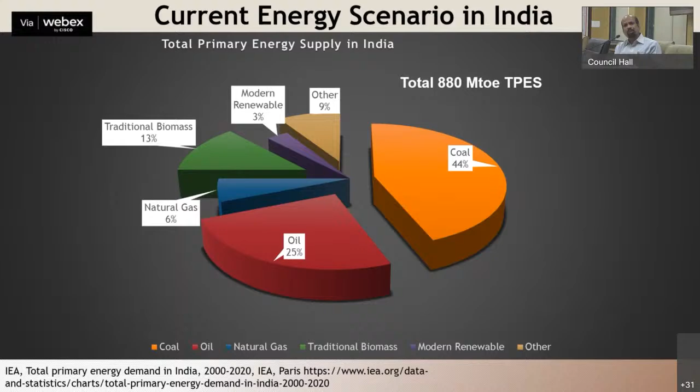If you see where we get this 900 million tons of oil equivalent, it's primarily from carbon-based sources. Coal contributes roughly 44%, oil is 25%, biomass 13%, natural gas 6% - more than 90% comes from carbon-based sources. The renewables and other contributions are very small. This is not only the case in India, but mostly the world average as well - the numbers are very typical to this.

Let's look at how much we have, what nature has given us, and how much we import. As we all know, oil is the most critical aspect because two-thirds of this energy source, especially oil, we import. Coal is also almost one-third imported. Natural gas is almost 50-50. So a significant portion of total primary energy sources are imported, and that is basically what Kakodkar Saab used to say is an important element on the health of our economics. Our country, because more than 50% of total energy is imported, bears a big burden on the tax system.

Then how do we consume that? So 900 million tons of oil equivalent is imported. When you convert to usable energy form, roughly 600 to 650 million tons of oil equivalent is what we consume after the losses. Out of that, today especially for India, industry is one of the largest consumers - almost 40% of energy is consumed by industry, both for heat and electricity purposes, followed by residential at almost 30%, again mostly for electricity as well as for cooking and heating purposes. Transport comes next, almost close to 16%, which is roughly 100 million tons of oil equivalent, and the rest, about 13%, goes to the services sector.

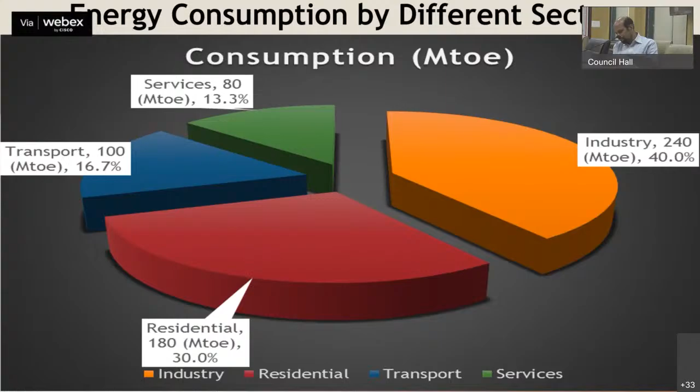But fortunately or unfortunately, let us leave that for the time being, because we have a large population, roughly 1.4 billion, so our per capita energy consumption is quite poor. Today we consume something like 1208 kilowatt hour per year, which Dr. Grover Saab has been saying. Look at our neighbors - they consume much more than us, more than two times, three times.

The world average energy consumption is almost 3 times what we consume in India. OECD countries consume more than 7 times what we have. So there is a big difference between what we have and what we should target—3 times or 5 times—because per capita energy consumption is closely linked to the Human Development Index.

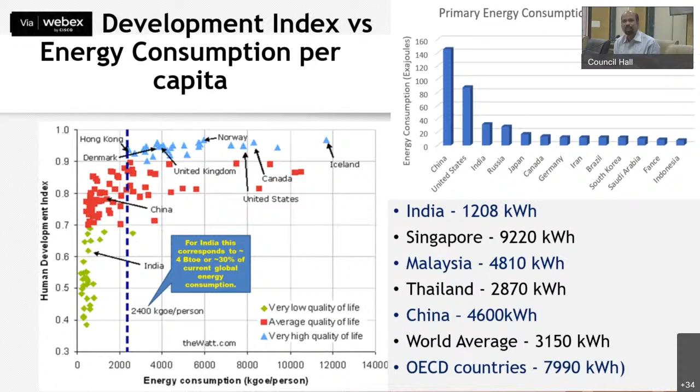If you look at the bottommost graph, India is not so well placed, and we have to climb towards the top, having an HDI of 0.9 or at least 0.8. That way, per capita energy consumption has to multiply by several times. This is one front.

But where is the energy demand coming from? The Niti Aayog says India today houses roughly 100 million people without access to electricity and more than 840 million people without access to clean cooking fuels.

Our installed electricity capacity has jumped quite fast, from 169 gigawatt to 377 gigawatt in the last 10 years, with a compound annual growth rate of more than 8.42%, which is significant compared to the world. This is primarily driven by our economic growth, one of the fastest in the world.

But there is a problem with our population. The Population Reference Bureau has estimated Indian population to reach something like 1.67 billion by 2050, surpassing China. Similar estimates by the UN project around 1.64 billion by 2050.

That means another 20 to 30 crore people are going to join us in the next 20 to 30 years. The implication is that India will soon become the world's most populous country, adding the equivalent of a city like Los Angeles to its urban population each year.

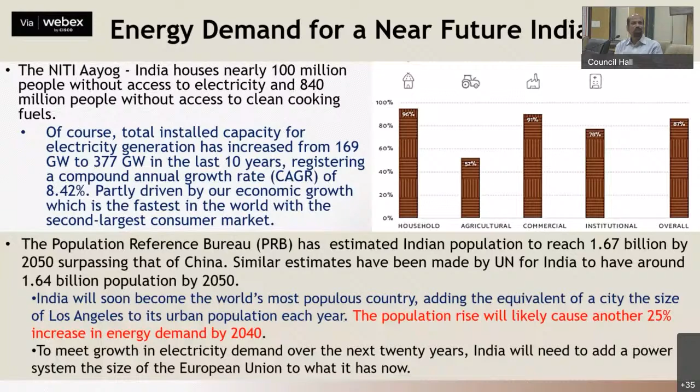This population is going to demand another 25% energy by 2040. To meet the electricity demand over the next 20 years, India will need to add a power system the size of the European Union to what it has now.

India's urban population is projected to increase from 31 to 51%. So there is going to be significant energy demand, especially in the urban sector.

The GDP is also going to grow at 8.5% from 2012 and remain steady till 2047. There will also be higher energy demand in the manufacturing sector, expected to rise to 34% in 2047 from 16% in 2012.

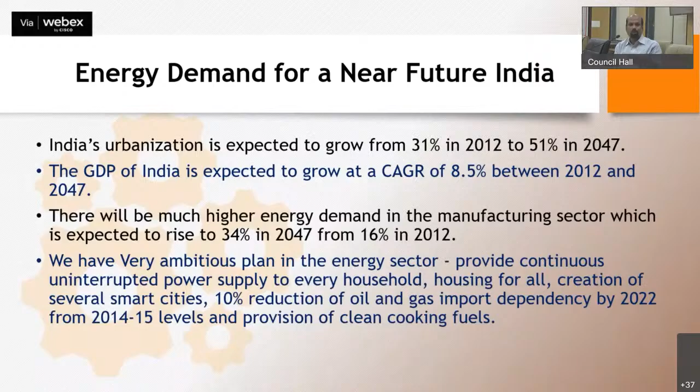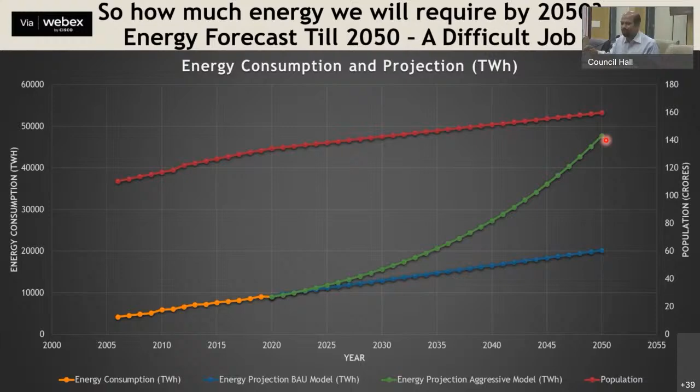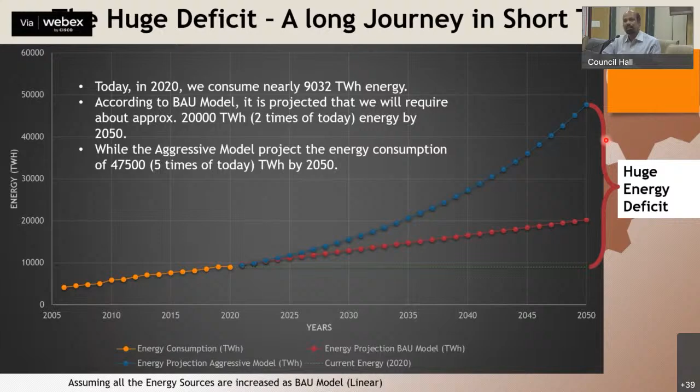As I said, in 2020 we consumed nearly 9,032 terawatt hour energy. In the BAU model, 20,000 terawatt hour, roughly 2 times today's consumption, is what we need to achieve. With the aggressive model, assuming we want a life closer to the Western life, we need to produce 5 times. So if I look at the difference, it's a huge energy deficit of at least 10 to 40,000 terawatt hour, which must be achieved in the next 30 years.

Even with 10,000 terawatt hour, let's look at the biggest story worldwide, including India - the greenhouse gas emissions. As I said, more than 90% of the fuel we consume is linked with fossil-based fuels. Today the carbon-based oxides, including carbon monoxide and carbon dioxide, are the root cause of greenhouse gas emissions. Almost 76% of GHG is emitted from carbon-based sources because of CO2 and carbon monoxide.

Another 16% is from methane, which comes from biomass and waste. Nitrous oxide is almost 6%, and fluorine-based gases emit 2%.

Historically, from 1990 to 2020, roughly the last 30 years, look at how much greenhouse gases we have added to the atmosphere. Believe it or not, we have added very significantly - from roughly 40 gigatons of CO2 equivalent in 1990 to almost 60 gigatons CO2 equivalent in 2020. Roughly you can say almost a 50% increase has happened in the last 30 years.

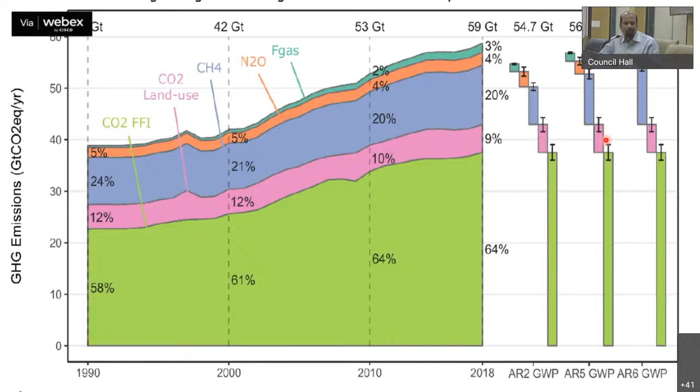Whatever happened is because of the type of fuel we consumed. Similar things have happened not only from carbon-based sources, but also from methane, nitrous oxide, and fluorine-based gases. Proportionately, they have all increased - it's not just CO2 or carbon monoxide alone.

Let's compare who has emitted how much. China is today the largest emitter, almost 10 billion tons, followed by United States and India. Russia follows. When you compare per capita CO2 emission, we are probably one of the lowest among these countries, even compared to Russia or Brazil. But because our population is large, we also emit a large amount compared to China or United States. So China is emitting almost 10 billion tons, followed by United States, and India roughly emits 3.5 billion tons of CO2 per year.

If you look at the sectors which emit the most, coal, oil, and gas are the prime drivers of CO2 emissions, amounting to more than 70 to 80% of the total, followed by cement and net land use.

Historically, from 1850 to 2020, especially after industrialization happened, these components started steadily rising, and today they have expanded very significantly - especially beyond 1950, it has significantly increased.

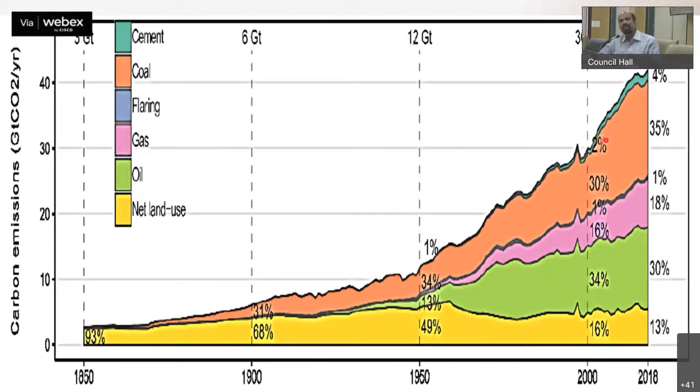Similar behavior is seen in India - we have also steadily increased CO2 emissions exponentially. They have been rising for the power industry, which is one of the largest, followed by industrial combustion and transport sectors. Non-combustion sectors also emit a significant amount, followed by, last but not least, the residential sectors.

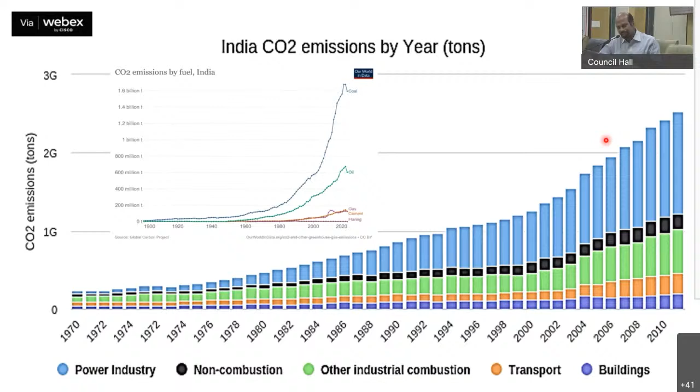This is one of the very important slides I wanted to share because of this year's Nobel laureate, physicist Syukuro Manabe, for his excellent work done many years back on how much the earth gets heated because of greenhouse gas emission, especially carbon dioxide emission. Many years back he had calculated and predicted that if CO2 concentration increases by 2 times in the environment, the temperature of the earth is going to increase by 2.36 degrees Celsius, and almost an equal amount is going to cool down if the CO2 concentration in the environment reduces.

A very, very important thing - initially people did not believe carbon dioxide was the root cause for the temperature rise, but now it is well known, and this number is very important: if the concentration increases by 2 times, the environment temperature increases by more than 2 degrees Celsius. Let us record this number right now in mind.

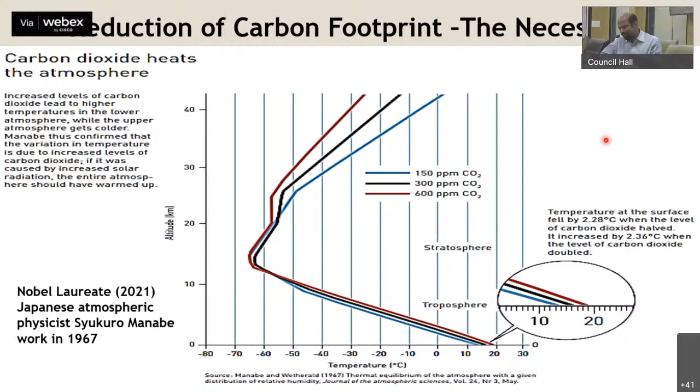How much have we climbed in CO2 concentration historically? From 1750 until around 1900-1930, the change in CO2 concentration was negligibly small. Beyond 1900, CO2 kept climbing, largely because of significant industrialization, growth in the transport sector, and our hunger for energy. These are the reasons why the concentration kept on rising.

How much has it increased? If you look at the leftmost axis, it has gone from 280 ppm and climbed to more than 400 ppm, almost 50% higher. The amount of CO2 has jumped from roughly 5 gigaton CO2 in 1750, and today it is almost 30 gigaton CO2 which we have pushed into the atmosphere.

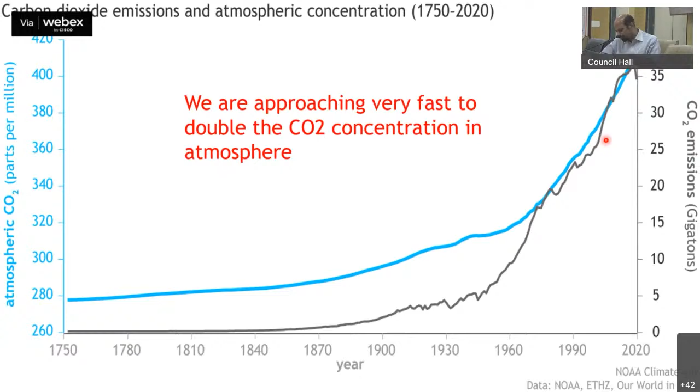This 2 degrees Celsius, which I showed 2 slides back, has a very important bearing on the atmosphere, the health of the environment, the health of the earth. Why should we limit below 2 degrees Celsius? If we double the amount of CO2 in the atmosphere over the pre-industrial level, the earth would warm up more than 2 degrees Celsius, as I showed you 2 slides back.

Some scientists predict it can warm up between 1.5 to 4.5 degrees Celsius. The biggest question is how much warming humans can tolerate. It's a really complex and highly non-linear bioscience. Nobody has an answer today as to how much we can safely tolerate.

The 2 degrees Celsius limit was endorsed by a council of German scientists who were advisors to Angela Merkel when she was the environmental minister. They reasoned that human civilization had developed in a period when sea levels remained stable and agriculture could flourish. Staying within that bound and preventing global average temperatures from rising more than 2 degrees Celsius seemed like a reasonable rule of thumb. But critics did not accept this.

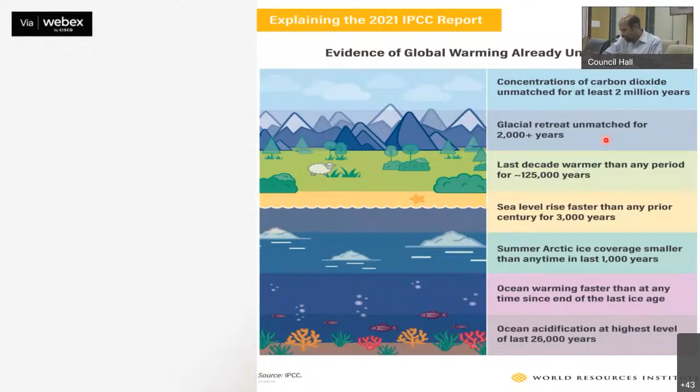So how much warming can we still bear, if we keep adding carbon dioxide? The IPCC report found 3 scenarios. One is low emissions, where global temperature rises to 1.4 degrees Celsius. If we continue with high emissions, we go to 4.4 degrees Celsius, which is relatively 3 times worse for our environment conditions.

This will have implications especially on precipitation, which can be 3 to 3.5 times worse, from 2.4% to 8.3%. The global mean sea level rise can be 2 times worse, from 0.38 meter to 0.77 meter. And the worst is Arctic sea ice, which can reduce by 8 times, from 2.4 x 10^6 square kilometers to roughly 3 x 10^5 square kilometers.

Then what is your CO2 budget? This is also very important. If we want to limit to 1.5 degrees Celsius with a 50 to 67% probability, our carbon budget is 400 to 500 gigatons. Suppose we have to limit at 2 degrees Celsius, that is between 50 to 67% probability, our carbon budget is between 1150 to 1350 gigatons.

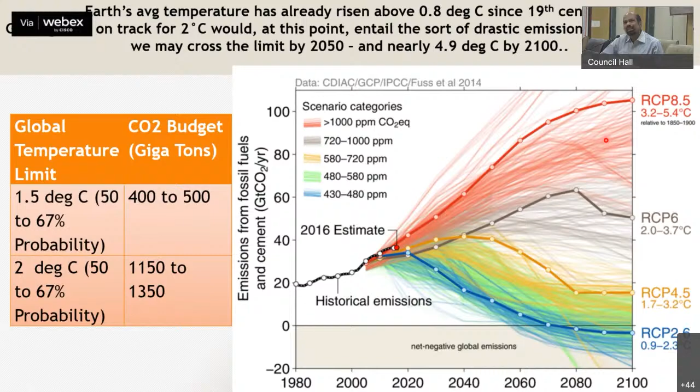Today we know by 2020, we have already added 40 gigatons of CO2 per year. So to reach 400 gigatons, it is just 10 years from now. To reach 1200 gigatons, it is just 3 decades from now. So the rule of thumb is, how do we want to proceed? The implication is that if we want to reduce the Earth's temperature below 2 degrees Celsius, we need a drastic emission cut to reach below the 1.5 degrees Celsius limit. So that is what we have to keep in mind.

It is not that we have just sensitized ourselves. The world is working. The world is highly sensitized. There are a lot of international efforts to reduce greenhouse gas emissions. And it has been well recognized that deep decarbonization is an important aspect in the energy sector to reduce CO2 emissions.

For example, in 2010, US electricity generation was producing something like 500 grams of CO2 per kilowatt hour. To achieve the 2050 target set by the Paris Agreement, they need to reduce by 97% of that, that is to less than 15 grams CO2 per unit. That means from 500 to 15. And a recent study by MIT researchers suggests that 15 grams CO2 per unit is still very high. They need to reduce below 1 gram CO2 per unit.

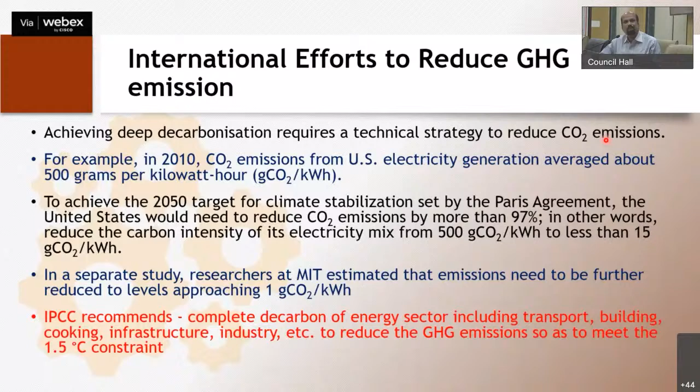The IPCC, in a very recent report, recommends complete decarbonization of the energy sector, including transport, building, cooking, infrastructure, industry. Almost every sector has to be completely decarbonized to reduce greenhouse gas emissions to meet, if we want to really meet, the 1.5 degrees Celsius constraint.

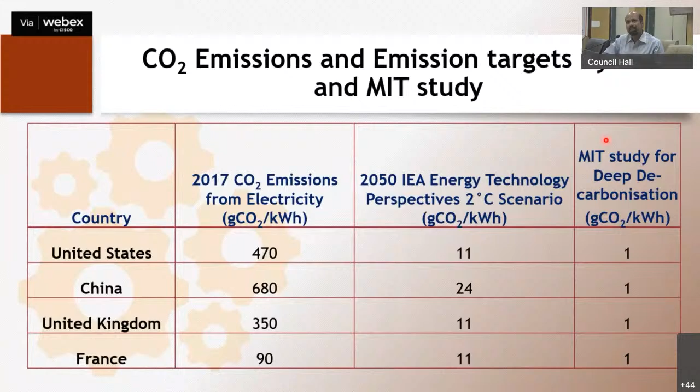So what do the United States, China, UK, and France have to target? In 2017, if you look at the leftmost column, per unit CO2 emissions are quite high. For the 2050 IEA target, under the 2 degrees Celsius scenario, the US has to limit to 11 grams CO2 per unit, China 24 grams, UK 11, France 11. And MIT says no, 11 or 24 is too high. They have to completely decarbonize the energy sector, down to almost 1 gram CO2 per unit.

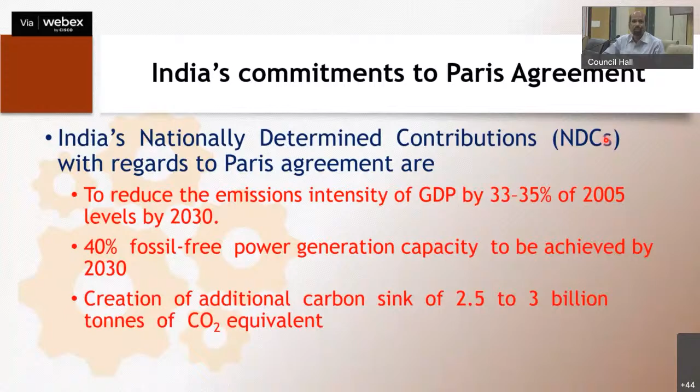India has made very serious commitments in Paris. These numbers I'm going to read are basically India's NDCs with regard to the Paris Agreement: to reduce the emission intensity of GDP by 33 to 35% of 2005 levels by 2030, 40% fossil-free power generation by 2030, and creation of an additional carbon sink of 2.5 to 3 billion tons of CO2 equivalent. It's a huge number, really, if you look at what I'm reading here.

To achieve that, suppose we target reducing CO2 emissions by 35% from a business-as-usual model, we have to reduce from 612 million tons of CO2, which we were emitting in 2005, to 397 million tons of CO2 in absolute emissions. That will restrict coal power to less than 300 terawatt hours per annum. Now suppose we target 15 grams CO2 per kilowatt hour, then our coal will be much, much smaller, hardly 25 terawatt hours per annum.

The COP26 five nectar, or Panchamrit, points which we committed to: India will reach non-fossil energy capacity of 500 gigawatts by 2030, meet 50% of its energy requirements from renewable energy by 2030, and reduce total projected carbon emissions by 1 billion tons from now till 2030. By 2030, we will reduce the carbon intensity of our economy by less than 45%. By 2070, we will be net zero. This is what we have committed in COP26.

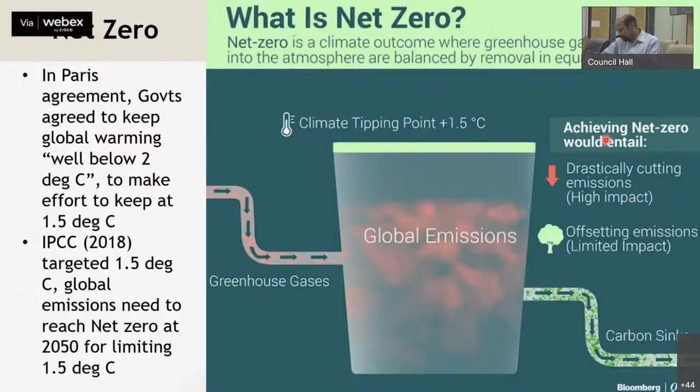The International Energy Agency recommends what we have to do to achieve net zero. We have to reduce CO2 to net zero by having 520 million tons of low carbon hydrogen, especially for transport and industry. These sectors have to do away completely from oil, gas, and coal. So 520 million tons of low carbon hydrogen has to be produced to meet the net zero condition.

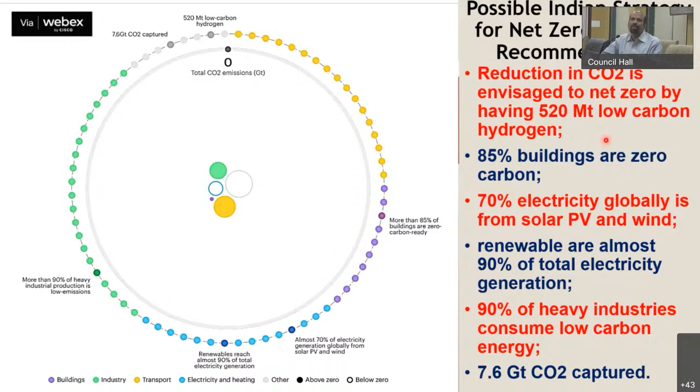Then almost 85% of buildings have to have zero carbon. 70% of electricity globally has to be from solar PV and wind. Renewables have to be almost 90% of total electricity generation. 90% of heavy industry have to consume low carbon energy, and 7.6 gigatons of CO2 have to be captured. These are very big numbers and a very critical approach if we have to achieve net zero.

And how does this reflect in the energy sector? Look, today we produce so much energy, but not in electrical form, which is used in industry, transport, partly in the residential sector, and also largely in agriculture and commercial sectors. What is projected is that agriculture, commercial, and residential sectors have to be almost 100% run by electrical form of energy.

The industry and transport sectors can run partly from electricity and partly from hydrogen. Especially the transport sector, we can say 60% of total energy can come from electricity and 40% maybe from hydrogen. Industry can be the reverse, maybe 30 to 40% from electricity and the rest from hydrogen. But where will hydrogen come from, that is a big question.

Hydrogen will come again from electrolysis, and that also requires electricity. Or by high temperature splitting of water, which can come again from heat produced from carbon-free energy. So the green hydrogen being talked about here also has to come from electricity. That means the full energy sector has to be obtained from electrical energy.

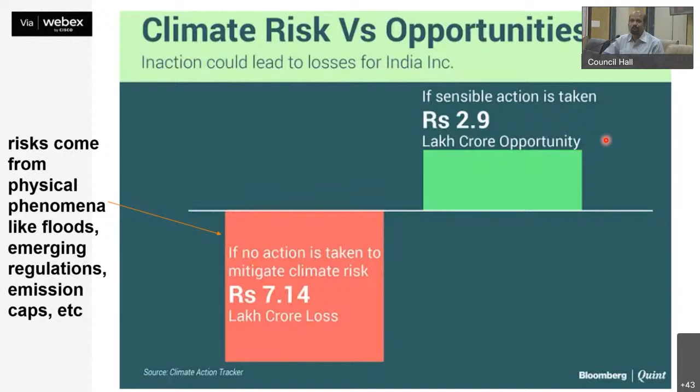So what risk and opportunity do we have? The risk is that if we don't target to decarbonize the energy sector for India, it is estimated there will be a loss of more than 7.14 lakh crores per year, because of floods and emerging regulations on emission caps and so on. But there are opportunities too, projected at something like 3 lakh crore we can earn. How? I will be speaking on that in some of the slides afterwards.

But before that, I'm bringing out the biggest dilemma in the energy transition: how much carbon-free electricity can this country produce? This itself is a big question, because today, in 2021, total installed capacity in the country is roughly close to 400 gigawatt, which is around 1381 terawatt hour per annum. It's a very small number, almost 1400 terawatt hour per annum, which is roughly 15% of the total energy we produce, with an average plant load factor of 53%.

And I am saying that if we go with the current growth rate, we have to target 20,000 terawatt hour per annum electricity by 2050. Or if we go by an aggressive model, 50,000 terawatt hour per annum, which is 7 times or 17 times today's electricity generation. Whether by 2050 all the systems I spoke about run completely by electricity, or electricity and hydrogen produced from electricity or high temperature splitting, it's a huge number we have to jump, 7 times to 17 times from whatever we have produced.

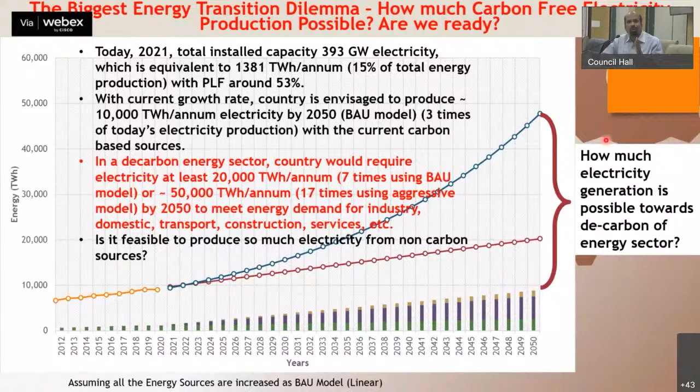On the other hand, suppose we keep growing before 2050 the same way we moved till 2020, especially in the electrical sector. Our estimate is that by 2050 we might produce 10,000 terawatt hour with all carbon-based energy sources, which is not acceptable. There is a big thinking that in this mid-journey to net zero, let us use coal, because it otherwise is a big burden on the economy. Let us continue with coal, with clean coal technology, carbon capture and storage, till we reach net zero.

But what is the implication? The implication is also serious. With carbon capture and storage, the efficiency of the power plant is reduced, and the cost of electricity production is likely to go up by 45 to 50%. And who is going to bear this? The consumer, due to the increase in fuel cost and capital expenditure.

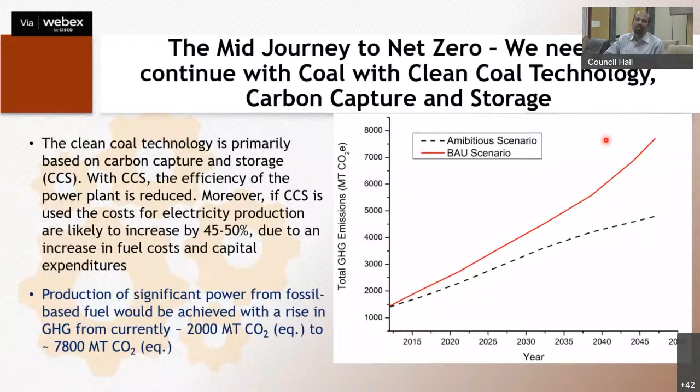Also by 2050, if you go ahead at the same rate as shown in the previous slide, till we reach net zero with coal-based technology, we are going to add something like 7,800 million tons of CO2 to the atmosphere. So this is another big concern.

So what is the option? Definitely the option is renewable sources. We have to look at renewable sources and whether we can accomplish such a huge deficit. But what is the maximum solar potential of India? How much has God given us? MNRE projects 1,640 terawatt hour per annum, assuming 3% of the wasteland is covered by solar PV.

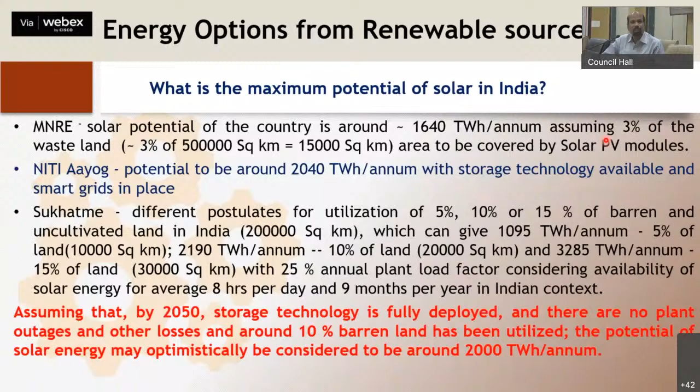Suppose we assume by 2050 full storage technology is deployed, there are no plant outages and no losses, and 10% of the barren land has been utilized. Our calculation is that maximum we can produce 2,000 terawatt hour per annum. Then if we sum up whatever MNRE has spoken about—wind, hydro, bio, and solar—together we can produce 3,826 terawatt hour per annum.

So today in 2022, we have 151.39 gigawatt electric installed capacity from renewables, which accounts for roughly 38.5% of total electricity generation. But with low availability of renewable energy sources, the installed capacity should be multiplied many folds to reach the country's requirements.

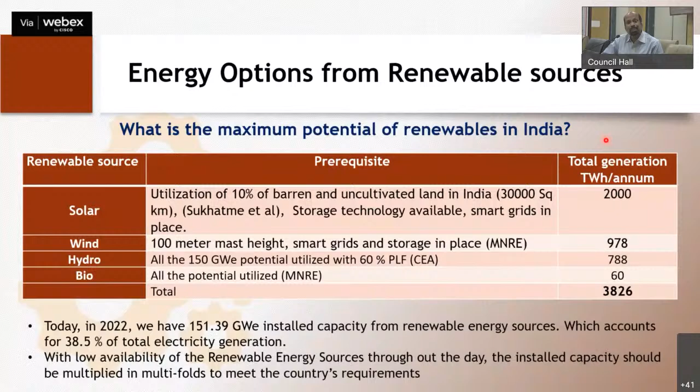The major issue with renewables, we all know, is they're intermittent. They're not available whenever there is demand. From winter to summer, the demand changes. Day, night, the demand changes. And wherever the demand is, probably it's not there. The poor capacity factor is because of that—around 20 to 30%, depending on whether it's wind or solar. Life of the plant with today's technology is small, needing replacement very periodically, with huge waste generation and management required.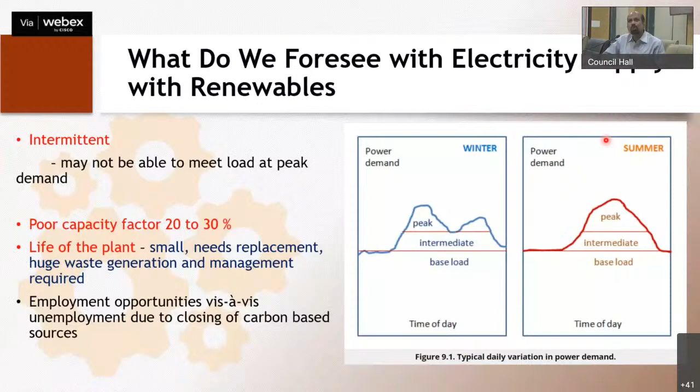Suppose we target such a huge 10,000, 20,000—I don't know—today it is 4,000 maximum that we can get. And the employment opportunity, the last point, is very, very critical. Today, India's employment is largely in carbon-based sources, which include oil, gas, and thermal power plants. Probably they are one of the largest employment sources in India. Tomorrow, if they are closed, what employment we generate in these renewable sources is a big question. What fraction of the people can we create employment for?

The base load is another very important factor. The base load means what we can continuously supply to the grid even though the load changes. It should be available almost 24 hours a day, all year around. Nuclear, coal, gas, hydro are well known—they are available with a high capacity factor. On the other hand, wind and solar are fluctuating, and they can be used for load sharing, not as the base load. It's well known.

Then why nuclear energy? High capacity factor, today as good as 90%, compared to solar's 20%. The land utilization—if you look at nuclear, because of the high energy density, we can produce 1 megawatt electricity in less than an acre, compared to renewables needing something like 7 to 10 acres. Life is 60 years as of today's technology, renewables 20 to 25 years. Nuclear is proven technology, with more than 60 years of experience. Hence, nuclear energy has to be considered an important element in the energy mix, especially to address the base load.

On the right side, a table gives a good example. Suppose we have a 100 megawatt electric plant operating 24 hours. They can produce maximum 2,400 megawatt hour energy. Nuclear power produces 2,167, coal produces 1,531 megawatt hour, natural gas 1,020 megawatt hour, hydroelectric 955 megawatt hour, concentrating solar 792 megawatt hour, wind 480 to 960 megawatt hour, and solar PV 360 to 456 megawatt hour. So if I build a 100 megawatt plant from solar PV, in 24 hours I can sell energy hardly 400 megawatt hour. But with nuclear, I am selling almost 5 times that energy.

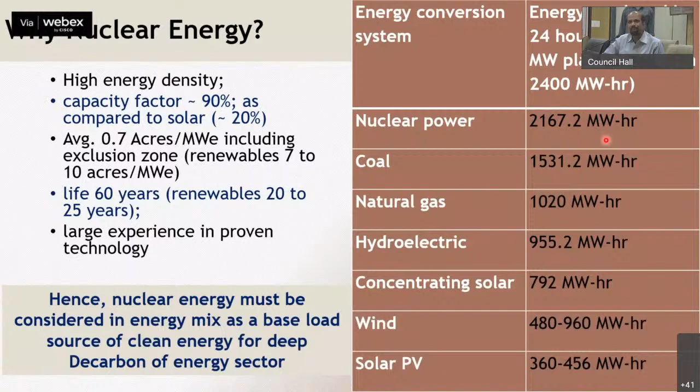The other aspect is how much gram of CO2 it emits per kilowatt hour. We all know coal, biomass, natural gas are very high emitters. But as compared to solar, wind and others, nuclear is also an excellent clean energy source.

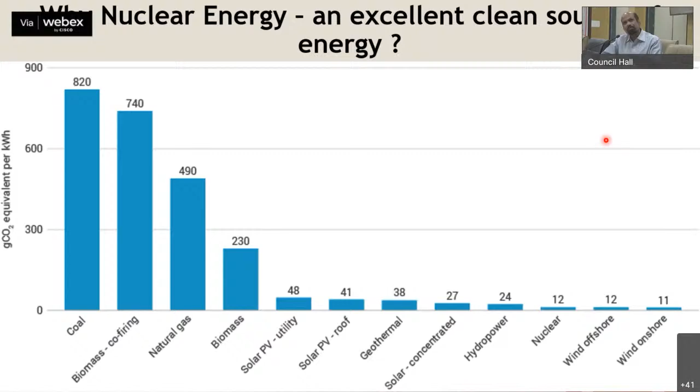So by looking at all these slides, it's very important that we augment the nuclear generation capacity in the non-carbon energy sector by several fold. It is very, very important.

The opportunity exists, especially look at the first point, because if we go for the non-carbon energy sector, a large number of coal-fired plants will be retiring. We need to replace them, especially to provide a base load when coal is not available. And then there will be much demand for green hydrogen for transport and industry.

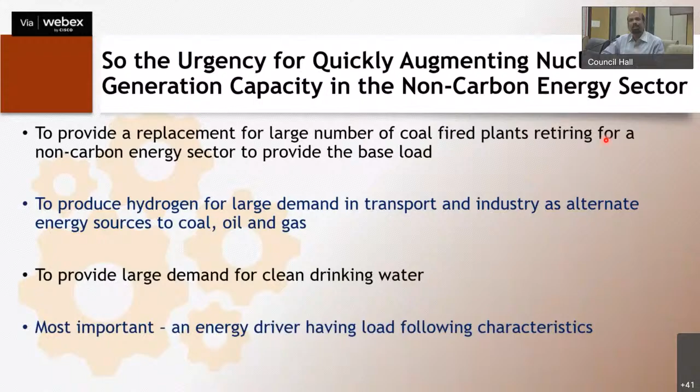Let's look at how nuclear can be a good candidate, especially for green hydrogen production, clean drinking water for desalination purpose, and most important, it is also an energy driver having very good load following characteristics.

Where are we and what do we target to be till 2050? Today in India, we have 22 units operating, producing 6,780 megawatt electric, 9 units under construction, and 12 units approved. Together, if we add everything, something like 43 units may produce 22 gigawatt electric by 2031.

And many more are planned, and if everything comes through, by mid-century, 2050, 66 units is a big number, but they will produce almost 50 gigawatt electric. If I convert that to energy with a very good capacity factor, it's only 400 terawatt hour per year.

And what we are talking about is 20,000 terawatt hour per year or 50,000 terawatt hour per year. So 400 versus this number is today negligibly small. And to meet the base load requirement, especially when coal is not available in the electricity grid...

It's well known there should be a stable electricity in the grid, which should be something like 30 to 40% of the total energy, and the rest 60 to 70% can come from renewables. And 30 to 40% of that number is a huge number - it's almost 8,000 to 20,000 terawatt hour in a carbon-free energy supply.

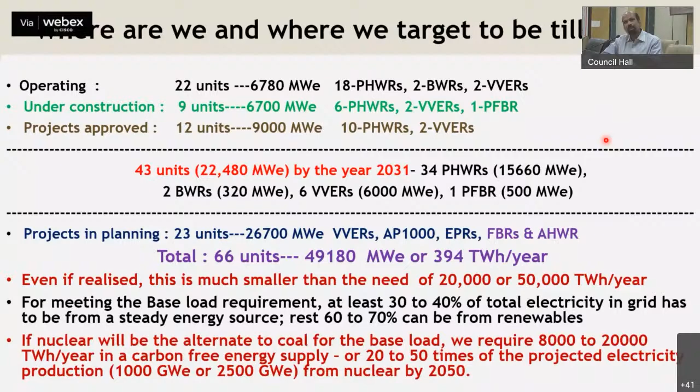So what is the solution? Let us look at the constraints with the current nuclear technology. The most important for India is acquiring several sites. The graph on the right will show you our population density as compared to other countries like China, US, France, and Indonesia. We are growing, and we have the highest population density country in the world.

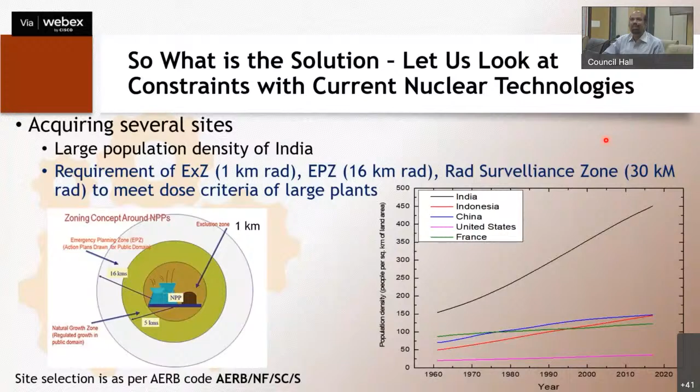And nuclear energy requires several zones - an exclusion zone of 1 kilometer, emergency planning zone of 16 kilometer radius, radiation surveillance zone of 30 kilometer radius, to meet those criteria of nuclear power plants. And if you keep so many zones one after the other, where is the site available to us is a big question.

The MIT study says that today one of the biggest constraints for nuclear expansion is the large project cost and construction delays. Because for a large size plant, the investment is huge. For example, to build a 1,000 megawatt plant, today you require something like 20,000 crores.

And because of significant on-site work and civil construction delays, the construction period is huge - it roughly takes 7 to 10 years to construct a plant. Then the 20,000 crore we invest today, one has to wait a long time to start getting the return. And because of non-modularity in design, there are issues and delays in supply chain, which affects the whole construction period. All this affects the interest during construction, which is a significant factor compared to total capital cost of the plant.

Safety issue of the current reactors - I see today excellent, but a very low probable core melt accident may occur. And that requires core melt mitigation strategy like core catchers, hydrogen mitigation devices, containment venting, and so on. These layers we keep putting for safety barriers, which adds complexity, cost, and also public fear against nuclear power.

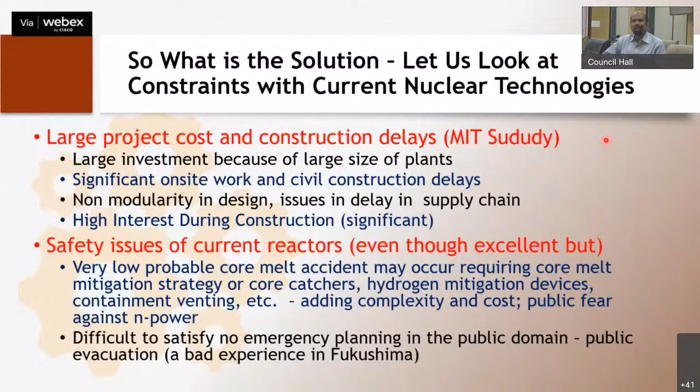Then it's difficult to satisfy no emergency planning in public domain, and that requires, if you look at the regulatory guide, public evacuation, which is really a bad test and a bad experience, especially after Fukushima. So is the SMR bringing a solution? So that's why let's look at SMR.

What is SMR? SMR is basically small modular reactors. These are advanced reactors having power capacity from 10 to 300 megawatt size as per the IAEA definition, and they are specially targeted to produce low carbon electricity, base load driver for electricity supply when the grid is supplied by green energy in place of coal, load follower, hydrogen production, desalination, district heating, electricity supply to remote locations, defense applications, and so on. They are small because they produce a fraction of the size of conventional large-size nuclear power plants.

Modular because all the components and systems are to be factory built and assembled like a single product, and they can be transported to the site for direct installation. So that is very important when I say modularity in design and construction. As a reactor, they still use nuclear fission for energy conversion.

Believe it or not, in the beginning there were only small reactors. So small reactors historically existed till 1970. The scale-up was there afterward. The large reactors were designed especially to get economies of scale. So small is not new. And if you look at the history of nuclear reactors, water-cooled reactors were the first ones where there is enough experience. To me, water-cooled small modular reactors are the low-hanging fruits which the world has been targeting to deploy.

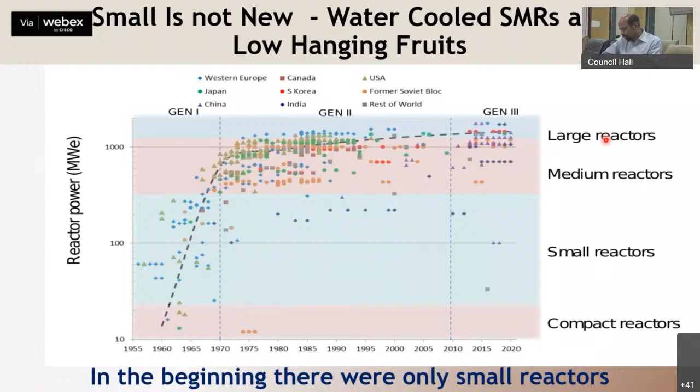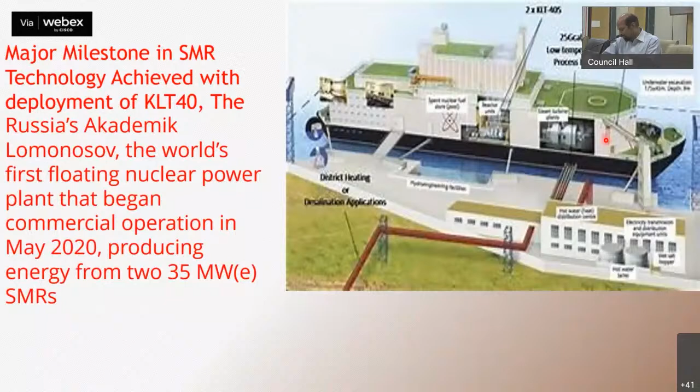The major milestone in SMR technology was achieved with the deployment of KLT-40, Russia's Akademik Lomonosov, the world's first floating nuclear plant, that began commercial operation in May last year, producing 2 units of 35 megawatt each. So this made history in the development of small modular reactors.

Three small modular reactors are in advanced stages of deployment. The CAREM is under construction. The NuScale, the American one, is in the advanced stage of licensing. The SMART, the Korean one, is almost licensed. Korea has joined hands with the UAE for deployment of the SMART.

CAREM is in an advanced stage of commissioning—well, almost towards commissioning. The first approach to criticality, proposed this year, is for an almost 30 megawatt electric plant in Argentina.

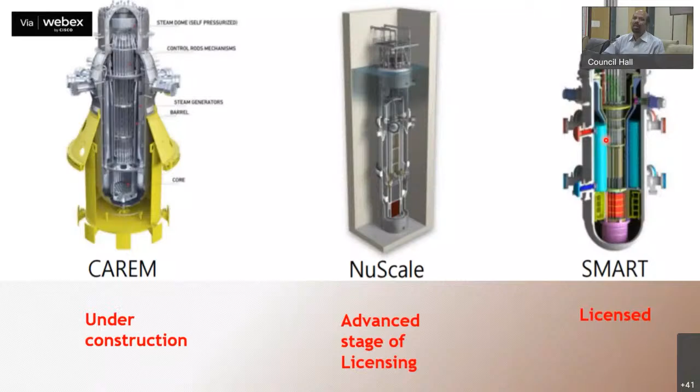NuScale in the US is designing a plant which is now planned to be built by several countries in Europe, as well as some Asian countries, and in the United States. Many others are also under construction, at a high level of development.

IRIS has almost completed the design of a 335 megawatt electric small modular reactor, led by Westinghouse, and many of these components or safety systems are being tested by a consortium led by Italy. The Westinghouse SMR is another one.

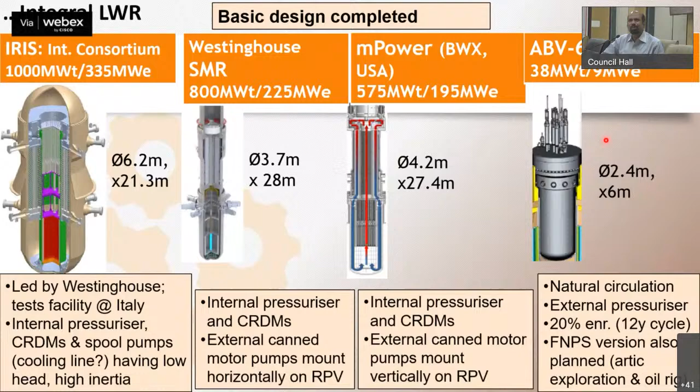It's called 225 megawatt electric, 800 megawatt thermal. They have also completed the basic design for that. The mPower, from Babcock and Wilcox of the United States, have also completed the basic design of a 200 megawatt electric plant. ABV-6 has also completed a smaller one, 9 megawatt, a 38 megawatt thermal plant. And there are 70 such designs being pursued, some in advanced stages of design, some having completed basic design, and some having also approached regulators for licensing.

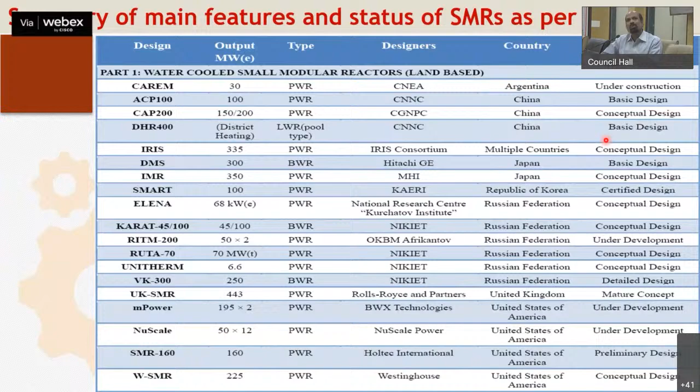I'm not going to speak about each one because of lack of time. So broadly, if you look at water-cooled SMRs, there are 2 types.

One is the block type SMRs, the left one, in which the steam generators, the pumps, are joined directly to the pressurizers, directly welded to the reactor pressure vessel. So the piping work here is almost eliminated—they are joining neck to neck. The right one is the integral small modular reactors, in which all the components of the reactor, like steam generator, pumps, pressurizer, are positioned inside the pressure vessel like a single unit. So these are the two variants which the world is pursuing.

The advantage of the integral reactor over the block type is that everything is inside the reactor, so there is no question of a loss of coolant accident. So safety-wise, the right one—the integral reactors—are much more safe as compared to the left one.

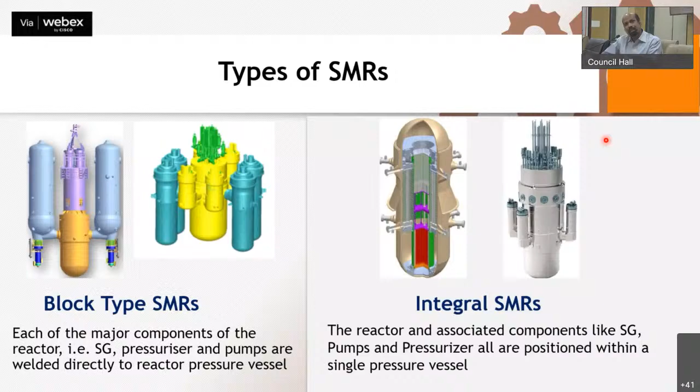So how do SMRs address the issues of current nuclear technology? The most important, especially if you look at India, is getting sites with no emergency planning zone requirement, because that currently requires a huge 16-kilometer radius. These small modular reactors carry almost zero risk to the public. They're designed with a trademark of no impact in the public domain. How is it achieved? The reactor is very small, below 300 megawatt, so the radioactivity inventory is small.

Release at the plant boundary never exceeds the allowable dose limit under any circumstances, and that is why public evacuation is almost eliminated by design. So it is what is termed a walk-away safe reactor, meaning in case of an accident, the operator can even walk away, leaving the reactor to be safe on its own.

In this regard, we have done a couple of calculations. For a reactor size of 100 megawatt electric, even in case of an extreme accident where fuel pins are dry and no water is available inside the reactor pressure vessel, it can be cooled by air itself and ultimately cooled by the containment, which is also indefinitely cooled by air through passive means. Even for a 100 megawatt electric plant, the clad temperature never exceeds 750 degrees Celsius. For a 125 megawatt electric plant, it's hardly 825 degrees Celsius, and so on.

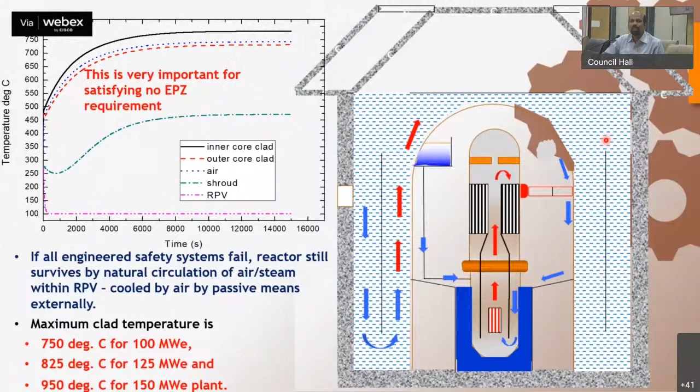That means if the plant size is below 100 megawatt electric, in case the fuel pins also dry out, we can still cool it by passive means externally with air without exceeding the clad temperature above 750 degrees Celsius. That means there is no question of hydrogen production for such an extreme event, forget about core melt.

We did similar calculations for a heavy water reactor based small modular reactor. If the channel power is below 6 megawatt, we found a similar situation where pin temperatures never exceed 800 degrees Celsius. That is why, since the pin temperatures are so low, they don't require an emergency planning zone.

Because of this, they have superiority over Gen 3 and Gen 3 plus reactors. Gen 3 plus reactors also use some passive systems in their design. However, if you do an accident simulation under certain conditions, there is a possibility of clad temperature exceeding beyond limits, which leads to hydrogen production and in some cases core meltdown. So these are the issues.

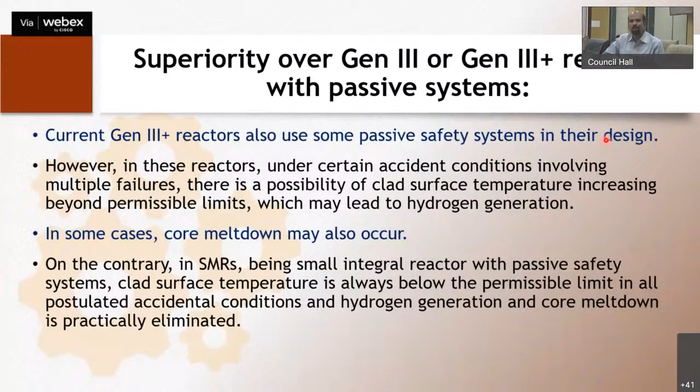On the contrary, SMRs being small, and if it is an integral reactor with passive systems in place, the clad temperature will never exceed the permissible limit. So it is extremely safe.

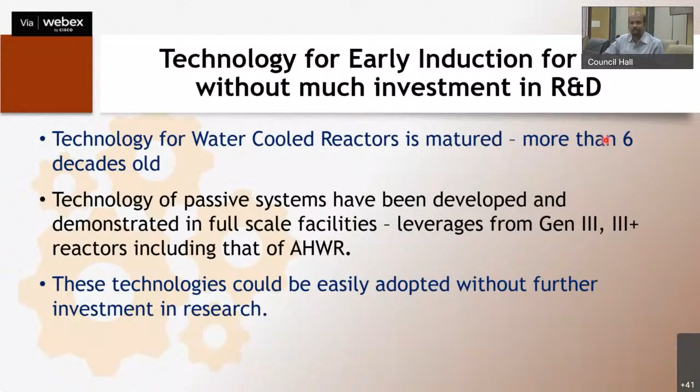Next is how early we can induct the small modular reactors. Technology for water-cooled reactors is matured, more than 6 decades old. Passive systems, especially for AHWR, we have spent no less than 2 to 3 decades on, and this technology has been developed and demonstrated. So this can be well leveraged without wasting time in R&D.

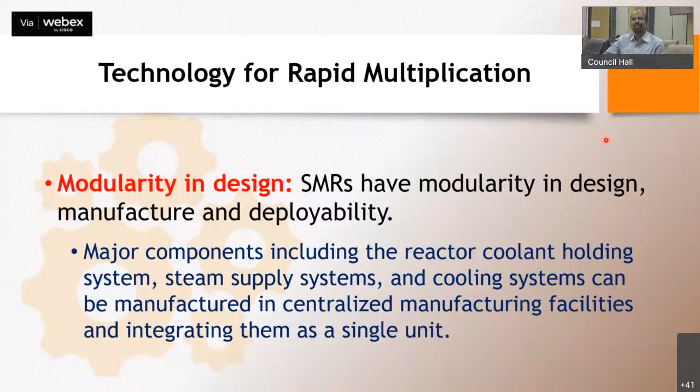This can be transported from the factory to the site for direct installation, so the work at the site is very, very minimum.

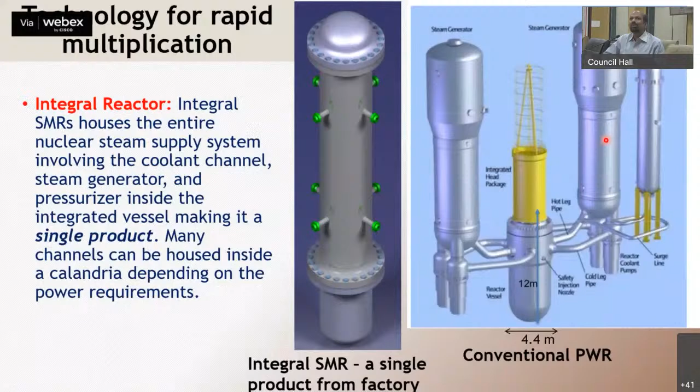Economic competitiveness is a major thing being argued worldwide. It's not a new topic, but there are a lot of studies done on this. SMRs differ from conventional reactors in many ways which decrease the overnight cost, especially looking at modularization, factory fabrication, and multiple units at a single site. So it is basically the economy of numbers versus size, which is the game.

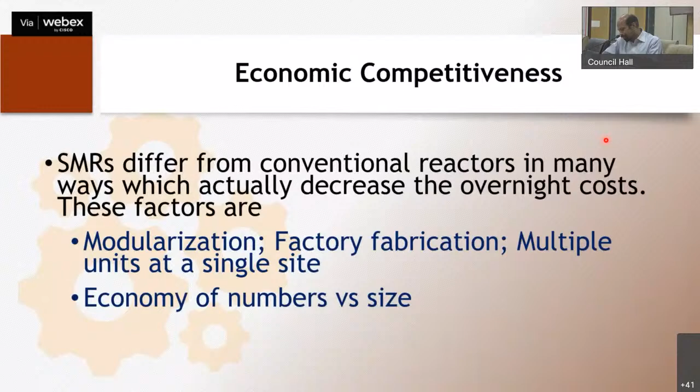Another advantage is lesser investment with early returns. A 100 megawatt plant might cost 2,000 crore, versus a larger plant which costs 20,000 crore. A small investor can put his money into a small plant, and if he knows that in 2 to 3 years he is able to produce electricity and sell it, the return is early. So many investors will be tempted to invest in small reactors, causing a large expansion in the nuclear power program. And because electricity is produced in a small period, construction delays are much smaller, so the interest during construction is much less than for large reactors.

This is true if the small plant is just a daughter of the large size plant. But in SMRs, it's not the same. The SMR design is almost different from the large size reactors, especially the fuel design. The steam generators, pressure vessels, pressurizer, even some without pumps, are all installed inside the reactor itself. The reactor containment is much, much smaller with steel containment, which takes much lesser time to build.

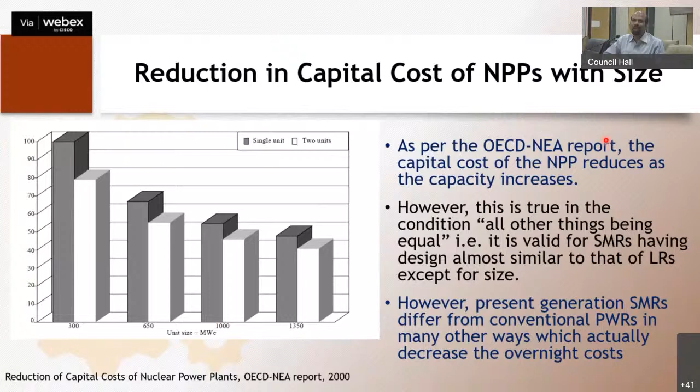So this SMR is not a daughter product of a large size reactor. They're completely different, so we cannot compare the power ratios of the cost of a large reactor to that of an SMR. Many experts have calculated how the cost reduces from first-of-a-kind to nth-of-a-kind. If we compare an 800 megawatt electric large size reactor, first to last, and similarly a 150 megawatt small modular reactor, first to the 8th or 10th, the reduction in cost is achieved in almost the same ratio.

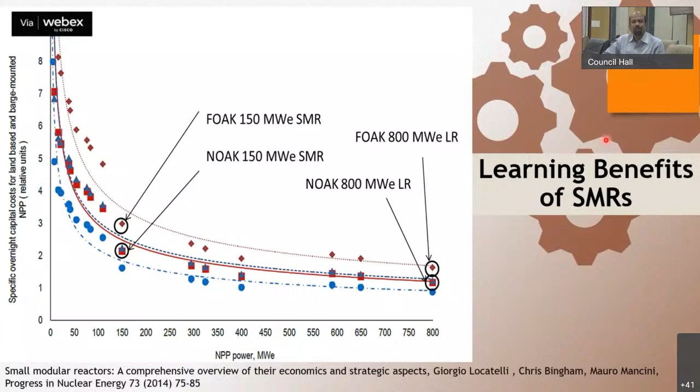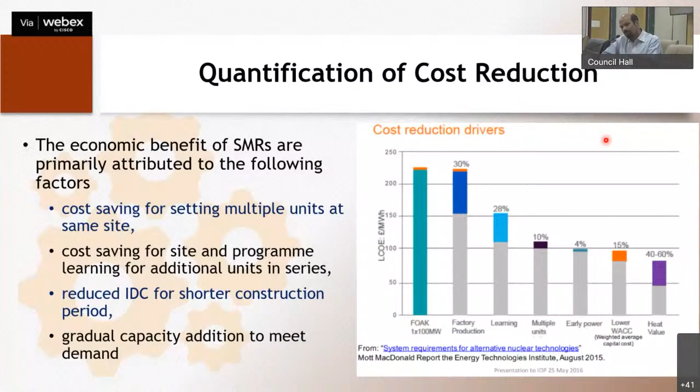Several experts have shown that if factory fabrication comes into the picture, the cost reduces by almost 30%. The learning from the first unit to the 8th or 10th unit will further reduce the cost by another 28%, and going for multiple units at a site brings another 10%, with early power adding another 4%, and so on. So if you compare a large size reactor versus a small size reactor, the cost can be reduced several times because of this.

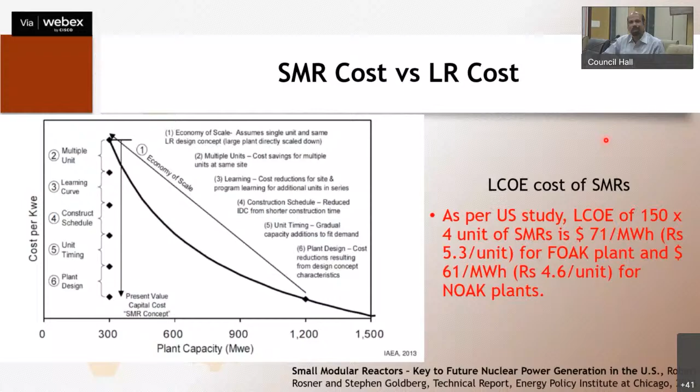A recent US study shows that the levelized cost of electricity for 4 into 150 unit SMRs could be something like 5.3 rupees per unit for the first-of-a-kind plant, and close to 4.6 rupees per unit for the nth plant. So it is not much different.

Next, what are we going to speak about? Load following for the small modular reactor. Load following is a very important aspect, especially when the grid is going to be supplied by electricity from renewables, as the grid is going to fluctuate a lot.

In a thermal power plant we drive the base load, and it's easy to maneuver load following by changing the amount of coal or gas fuel depending on demand, which is not possible so easily in a nuclear power plant. However, in small modular reactors, load following characteristics can be easily achieved by switching the number of reactors connected to the grid as per demand, and the rest can be coupled for electrolysis, hydrogen production, or desalination, depending on demand.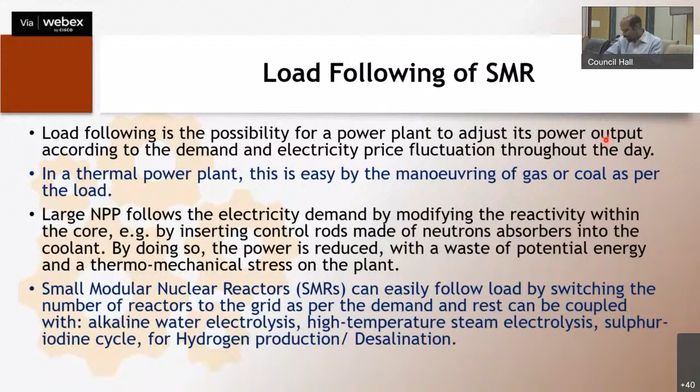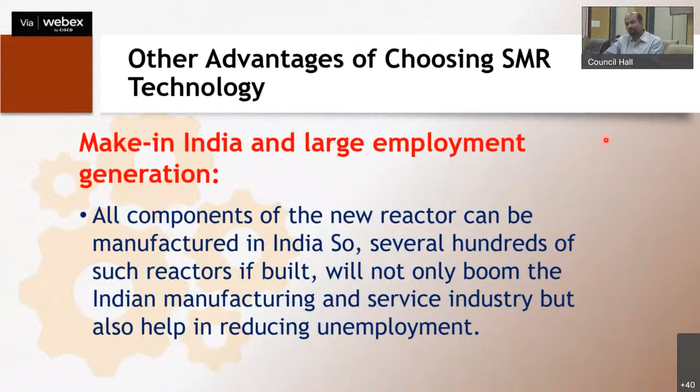Make in India, large employment generation - all components of this reactor can be manufactured in India. So several hundreds of such reactors, if we build, will not only boom India's manufacturing and service sectors but also help in reducing unemployment. Most important, this is what I was trying to speak about - how SMRs can fit into retired coal plants.

If you look at the year-wise capacity addition of coal plants by size, most of these coal plants were really small, less than 300 megawatt electric. Only a few, added very recently, were large size plants. Historically, only small size plants of about 250 megawatt electric were there in the thermal power sector.

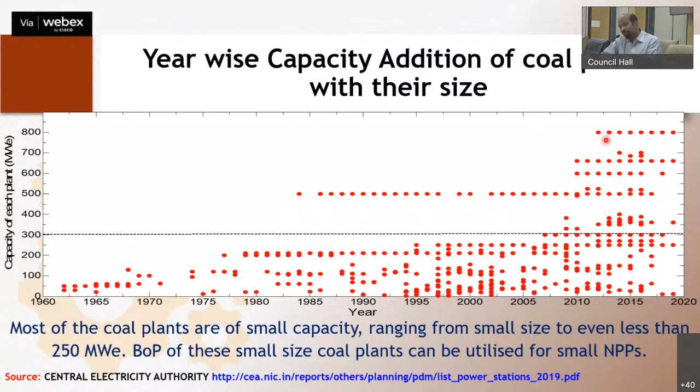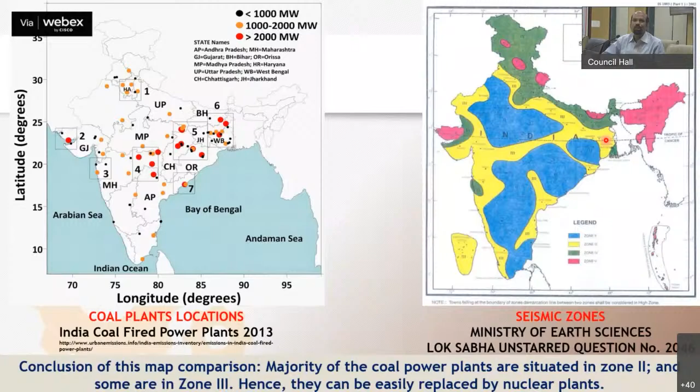Look at where they are located - most of these thermal power plants are located where coal is available, especially in Central India. And if you look at the seismic locations, they're mostly in Zone 2 and very few in Zone 3, which really qualifies them to be replaced mostly by nuclear power plants.

This history I took from the Central Electricity Authority shows that almost 8.4 gigawatt electric of coal plants have retired by 2020.

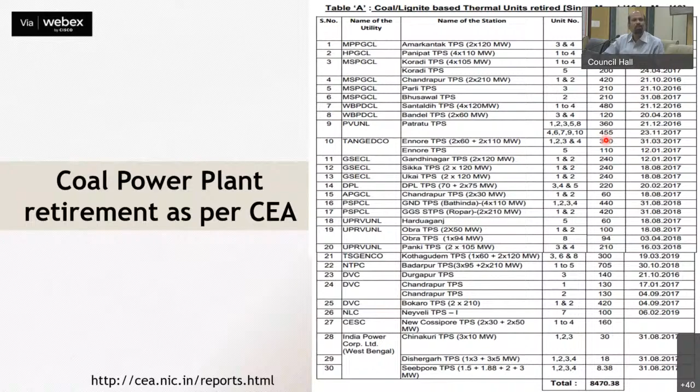Now let's look at a comparison. I have taken a site in UP, one of the thermal power plants. It produces 3,760 megawatt electric, a huge plant. There are several thermal power plants in this area. They occupy 10 kilometer square area without ash pond and 23 kilometer square area with ash pond.

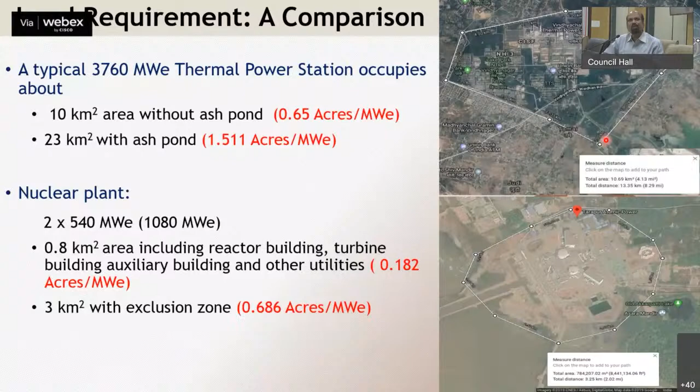Suppose we go by our conventional nuclear power plant, 2 into 540 megawatt electric, they will occupy 0.8 kilometer square area including reactor building, turbine building, and so on. That is almost 0.182 acres per megawatt. With 3 kilometer square if we consider exclusion zone, look at 3 kilometer square vis-a-vis almost 23 kilometer square which this thermal power plant was requiring.

Now let us say we give this 23 kilometer square for solar or wind; maximum they can produce 720 megawatt electric, as compared to the thermal power plant which was producing more than 3,700 megawatt electric.

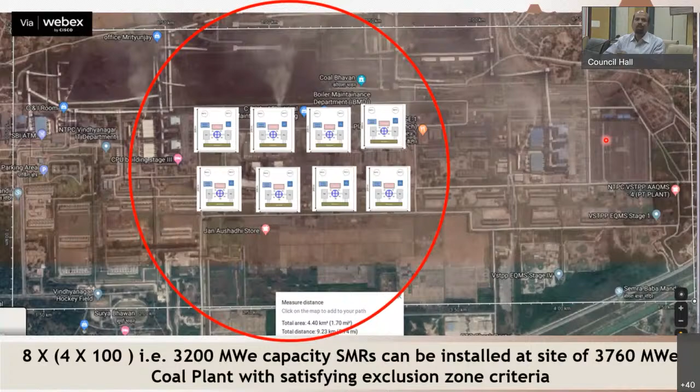We tried to fit in the footprints of these small modular reactors in that field, and we found that while keeping the exclusion zone of 1 kilometer radius, we can safely put 32 numbers, which comes to about 3,200 megawatt electricity capacity installed at the site of a 3,760 megawatt electric plant, while satisfying the exclusion zone criteria. If we go with solar and nuclear, with the 23 kilometer square ash pond, suppose we put solar,

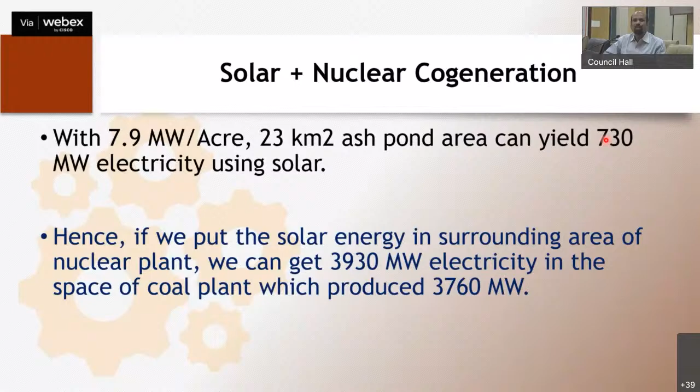they will yield additional 730 megawatt electric. So total we can produce 3,930 megawatt electricity as compared to 3,760 megawatt coal plant.

Hence, to replace the retired coal plants by SMR, what do we say? The exclusion zone criteria can still be maintained as per the AERB. For safety, these small modular reactors don't need an exclusion zone, but for nuclear security they will definitely require that 1 kilometer exclusion zone. EPZ is not required because of their qualification of no core degradation or hydrogen production. So integral PWRs or HWRs of 100 megawatt electric are safe enough to meet this criteria.

NIAS-BARC has conducted some studies, I'll show you here. Very recently it was presented during our joint meeting. These were the projects supported by BRNS. So if you look at the Talcher Thermal Power Station, this place is already abandoned.

Earlier this site was producing 460 megawatt. And if we put these small modular reactors in the same site, while fulfilling the exclusion zone criteria, 600 megawatt can be easily produced.

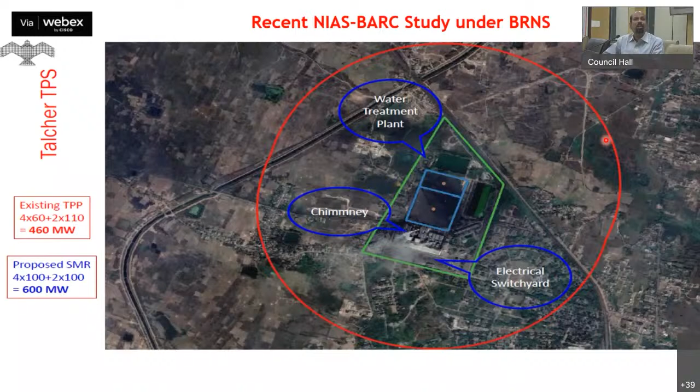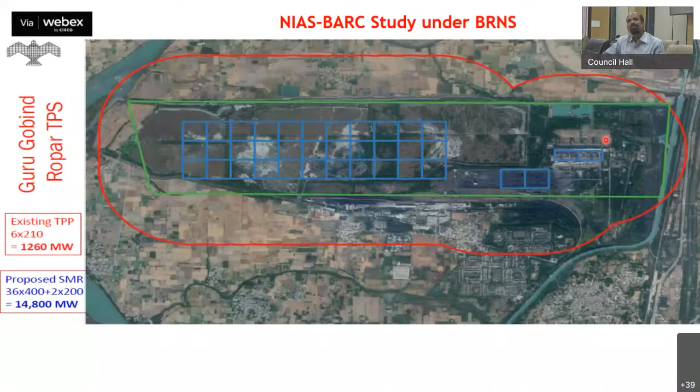In the Guru Gobind Ropar Thermal Power Station, this site was producing 1260 megawatt, and NIAS has put our SMR footprints here in the same region. It can qualify to produce 14,800 megawatt. It's almost 12 times what it was producing.

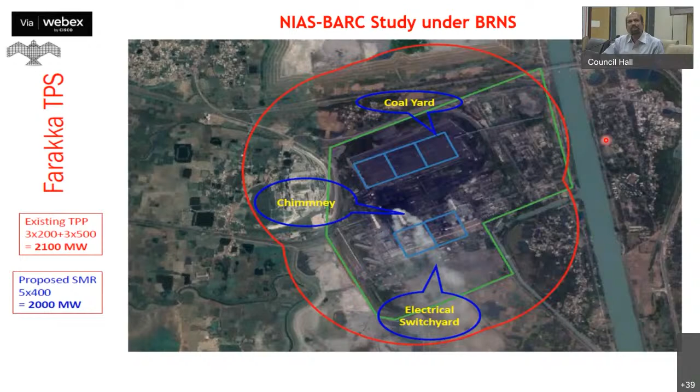The Farakka TPS, that is thermal power station, was producing 2,100 megawatt. If we put small modular reactors in that place, it can produce 2,000 megawatt, almost the same as it was producing. So this exercise is going on. I think in a few months we'll come out with a full NTPC site study, showing what amount of thermal power can be replaced by small modular reactors.

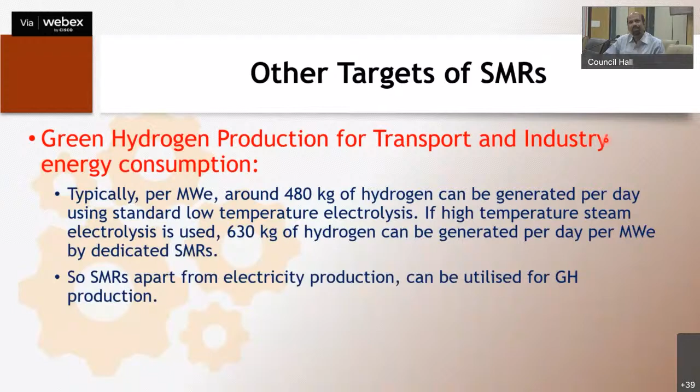The other target of SMRs is green hydrogen production. Typically per megawatt electric, around 480 kg of hydrogen can be generated per day using low temperature electrolysis. Suppose we go to high temperature steam electrolysis, almost 630 kg can be generated per day per megawatt electric, but that requires high temperature reactors. So SMRs, apart from electricity production, can be utilized for green hydrogen production.

This is another important slide I wanted to show you, how desalination is going to be one of the important attributes apart from electricity production or energy crisis. This is something the country is going to see very soon about the water crisis.

Look at the topmost table. In 1951, our per capita water availability was 5,177 meter cube per year. The rain god gives the same amount of water, but population keeps on rising. By 2050, suppose we are 164 crore, then our per capita water availability will be only 1,140 meter cube per year. Then it will be in the water stressed region as per the UN classification.

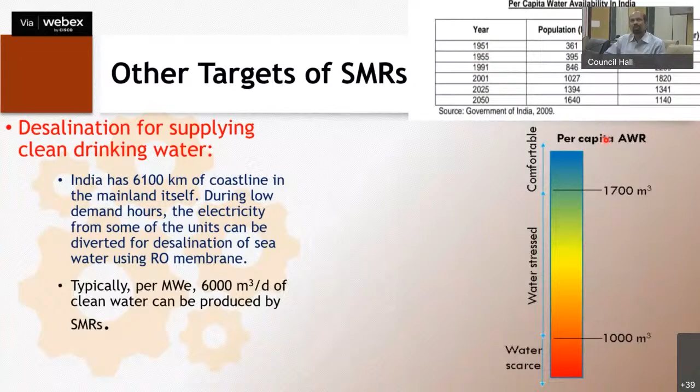In that case, desalination will be very important for supplying clean drinking water. Typically per megawatt electricity, 6,000 meter cube per day of clean water can be produced by SMRs.

So nuclear has a lot of potential. It's nothing to fear, but we should utilize this energy. But then, how are we going to utilize it?

If you look at the history of our science and technology, before 1950 or 1947, our science and technology was not at par with that of the Western world. But today, we are competing well enough with the Western world. So it is only the industry which has to groom itself enough, or be engineered enough, to take up these small modular reactors.